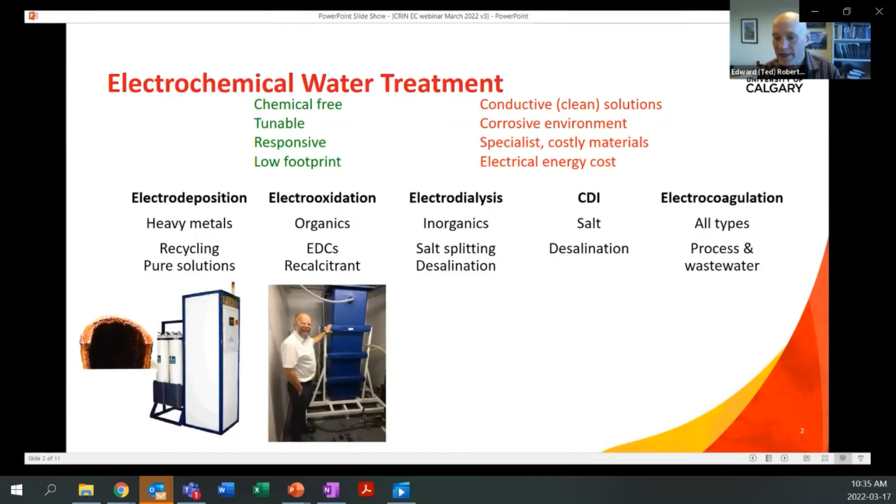Electrodialysis, where we use ion selective membranes to separate out salts. We can use it for desalination, and we can use it for salt splitting, so converting sodium sulfate into sodium hydroxide and sulfuric acid, for example. Then there's capacitive deionization, an emerging technology for desalination, where we adsorb ions onto the electrode and then release them into a concentrate solution. And finally, electrocoagulation, which I'm going to talk about in more detail in this presentation.

So I said I'd talk about the innovation process. I've seen successes and failures over my career in many different ways. When I came to Calgary, I was interested in looking at electrocoagulation for produced water treatment. I talked to several people in the industry, and they told me, oh, we tried it and it didn't work. That idea of 'we tried it and it didn't work' I've heard many times, not only for these technologies, but many others, especially in the environmental space.

What typically happens is an end user comes across this technology and thinks, oh, that sounds like a good fit. The vendor tells them all the benefits of this great technology, and they try it and it doesn't work. That's the end of the story. They invest a lot of money doing pilot tests, and it fails quite quickly. That happens 9 times out of 10 with that approach, I would say, and because of the investment being regarded as a lost investment, it's kind of a killer for the technology - no one goes back and tries it again.

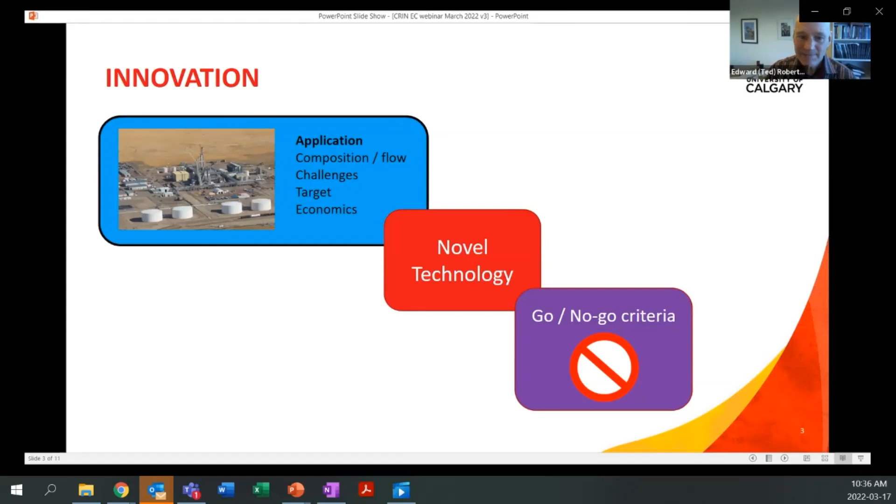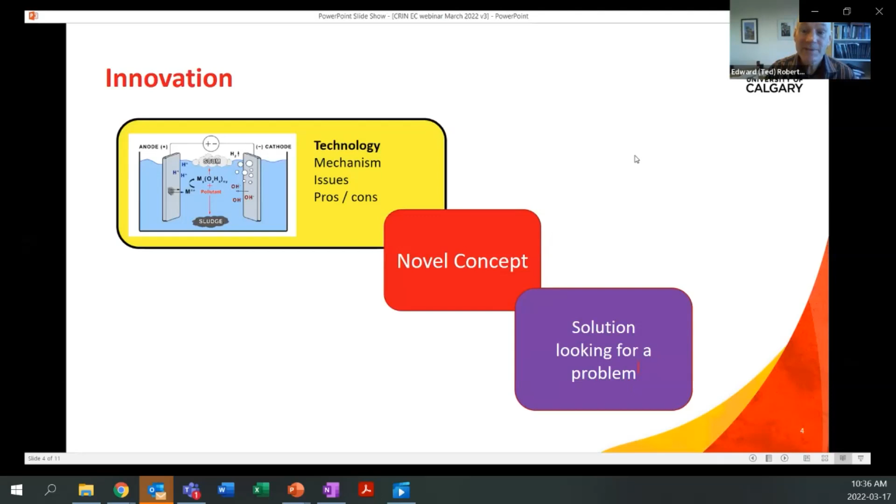The other strategy that fails often comes from the academic side, where I work. We research and try to understand the technology, its pros and cons, what the mechanism is, and then we come up with novel concepts trying to innovate the technology, and we come up with a solution. But if we don't really understand the application, we often end up with a solution that's looking for a problem. There are many examples of that, especially in the academic space. So what you really need to do is work together.

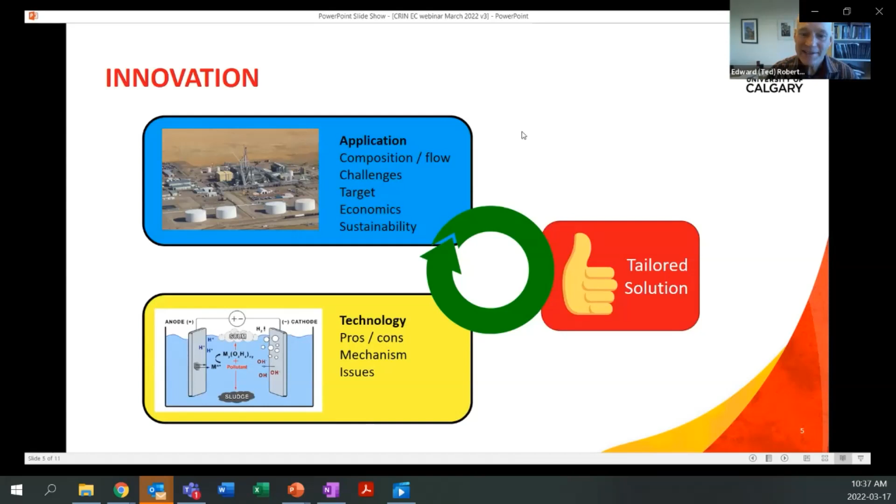So I think I've shown it as 2 boxes, but essentially it's 3: universities, the technology provider, and the end user need to work together, so we understand all of these issues together. It is not about plugging a solution into the application. It is about understanding what's going on, iterating until you have a tailored solution well suited to the application. For me, that's an iterative process, not just try it and see.

So for our case study of electrocoagulation for oil sands produced water, what is electrocoagulation? Very simple in concept, at least superficially. We simply put 2 metals, usually aluminum or iron electrodes, into the water. We pass a DC current that we suck electrons out of the anode, and that dissolves the metal into the water. At the cathode, we electrolyze the water, produce hydroxide ions, and that ends up as a metal hydroxide coagulant. So essentially, we're using electricity to dose the solution with a metal hydroxide, which coagulates and removes contaminants.

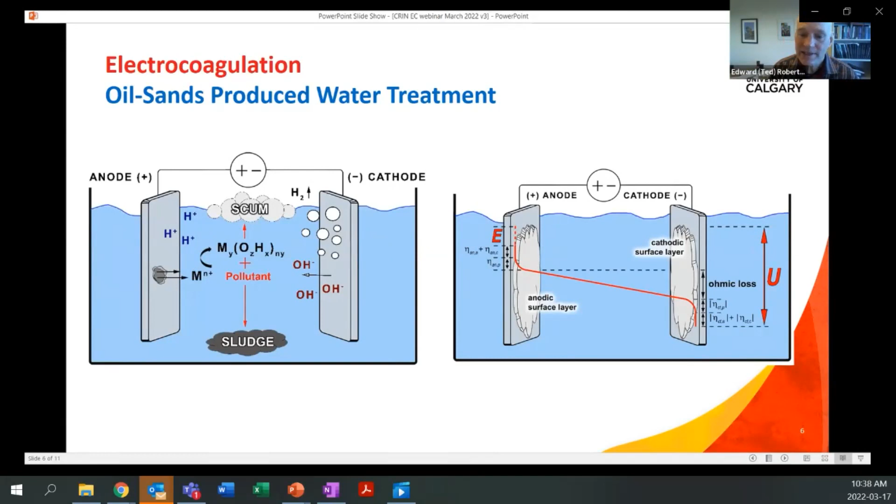One of the challenges we've been looking at is the formation of passivating or fouling layers on the electrodes, which is one of the major challenges for this technology. I'm not going to go through all the detail of what we've been doing, but we've been studying, trying to understand what's happening in this process, and it's extremely complicated. For the application, we have a salty produced water that has some other ions in it, and we have target contaminants, particularly silicate, calcium, and magnesium.

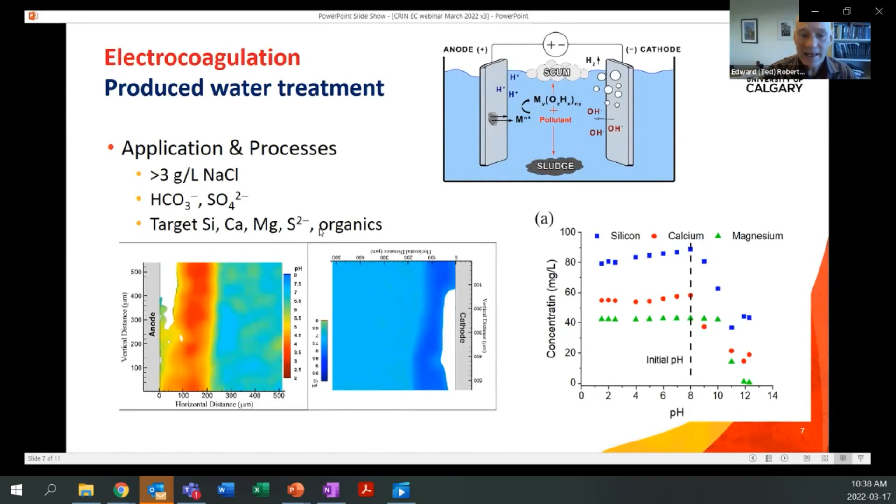One of the things we've been studying is trying to understand what's happening at the electrodes, and these videos are showing you the pH distribution close to the electrode. You generate an acid solution on the anode, but you also generate an alkaline solution at the cathode, and that can lead to precipitation on both electrodes of fouling layers and causes problems for our operation.

What we've also been looking at, we've used many different techniques so we can visualize the fouling layer. We can observe things like gas bubbles inside the precipitate. And we can also see that when we do electrochemical experiments, the ions can affect the height of this line on the right-hand side here, which tells us the rate of corrosion, the rate of dosing of the metal ion at different potentials.

What you find is with salt, sodium chloride helps the metal dissolve, but with sulfate, it actually passivates and stops that process. In our produced water, we have both sodium chloride and sodium sulfate, and so the sodium chloride helps our solutions dissolve. Through our experiments, we can try to understand what the role of all of these components in our application have on the process.

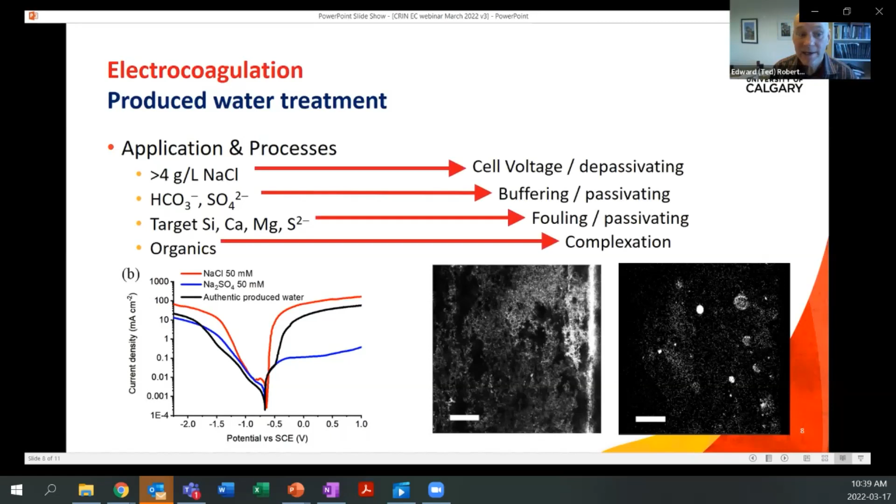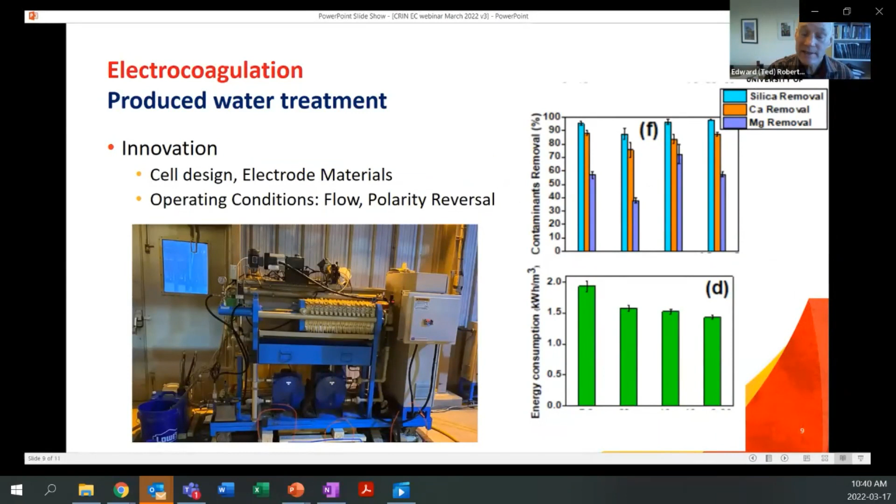That enables us to do innovation and design and tailor the process for the application. So what we've been able to do is reduce the energy consumption and enhance the contaminant removal through that process, and that requires us to tailor the cell design, the electrode materials, and the operating conditions to achieve that.

So just to wrap up, I really think that for these kinds of applications, especially for water treatment, you need this cooperative approach to make a tailored solution, and not to just give it a go and fail and give up.

I would, of course, add that it is not only a technical story, there is also the economics, the commercialization pathway. IP is often a challenge—who owns it and how is it going to be exploited. The cost of the investment required to scale up and the people involved. We've also often failed because the person in the company helping us leaves, and then we're left, and no one's interested anymore. That can also be a problem.

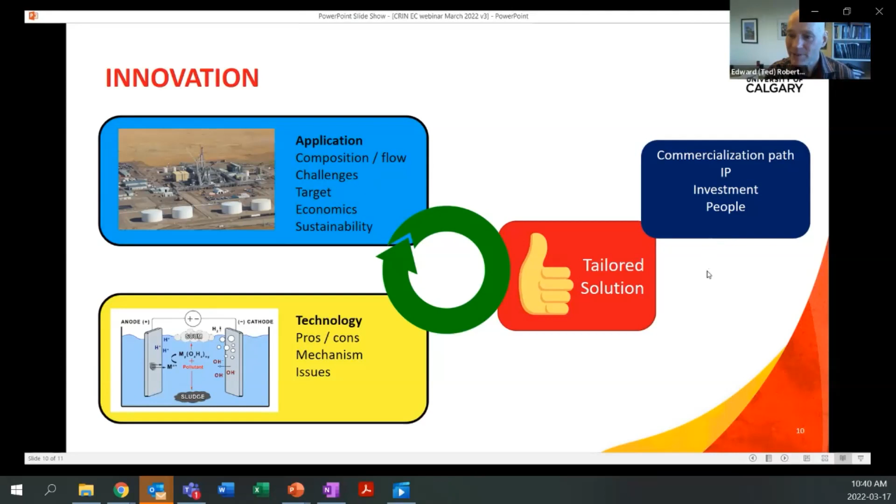So just to wrap up, I'd like to thank the sponsors of our research and our industry partners, and of course all of our researchers. I should tell you that we've had about 15 person years of research on electrocoagulation for the produced water application.

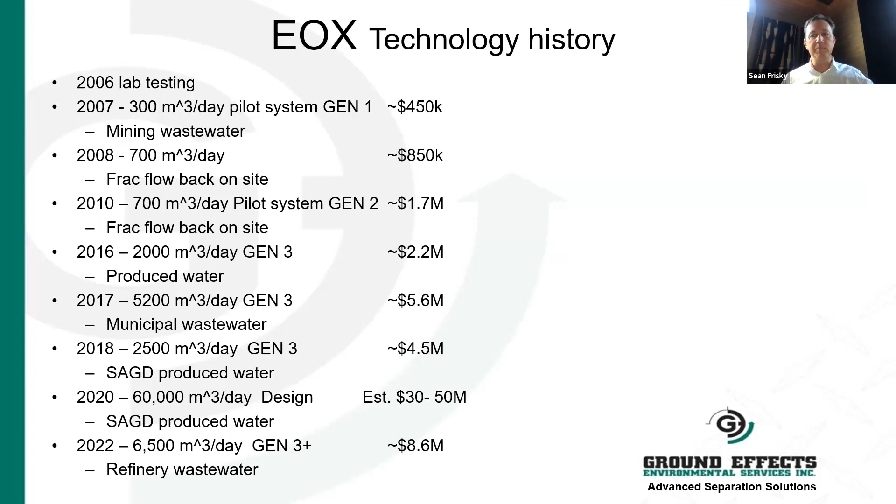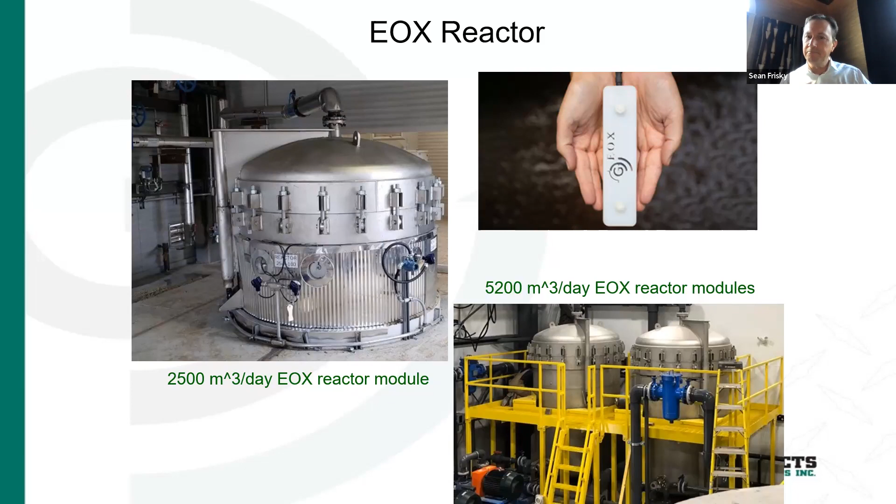The other point I wanted to make is that the electrochemical technology isn't standalone for the most part. As far as oxidation, it can be, but in typical oil and gas, there's emulsions, oils, suspended solids, all those things. So we look at it as the reactor - it's the thing that makes things happen. And then we need a process.

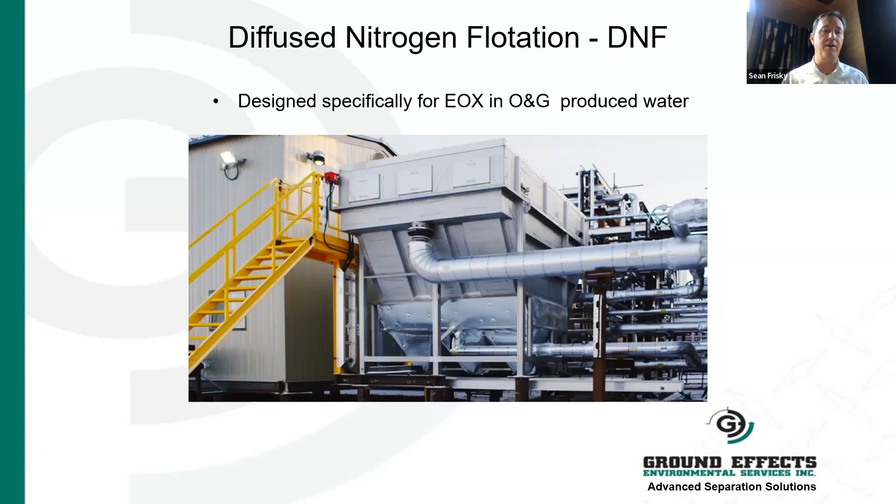Like most wastewater treatment processes, there's not too many that are single step, right? So we use our EOX reactor combined with the diffused nitrogen flotation. That's really what basically separates out all of your solids, your coagulated materials. So everything that becomes a solid can be separated off as a sludge. Next slide, please.

I'll just mention quickly before I get into this slide - we would typically follow that with some type of filtration, and it would depend on what the customer requirements are. So it could be from a simple media filtration, or it could be submerged ceramic membrane, depending on what the requirements are.

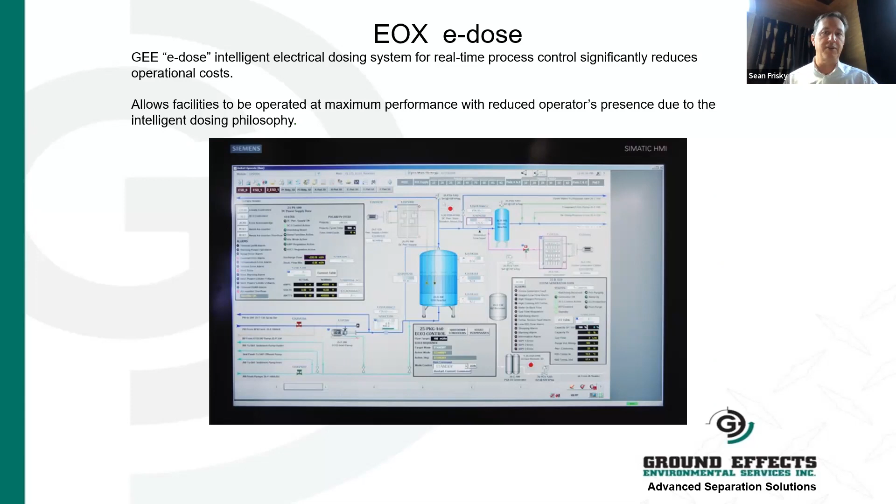Our e-dose system - one of the cool things about this technology is its ability to be tunable: the electrode gap, the electrode size, the reactor size. Those are all physical things that we would test in the lab before actually building a system for a site. When we're on site, the easily tunable things are electrode gap and amperage.

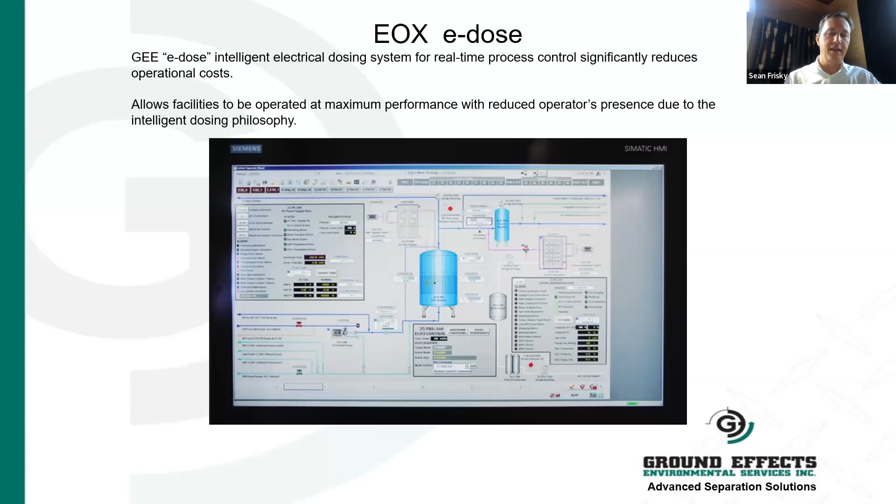So most of the tuning is based on amperage, and we can actually put in instrumentation on the back end. So if we aren't meeting one of our desired criteria for effluent, the system can automatically essentially dose, as Ted alluded to in his presentation. It can dose more electrode and create more electrochemical reactions simply by turning up the amperage. So it's a very tunable in-the-field type system that can be completely automated to maximize efficiencies, both from an electrical consumption and effluent criteria perspective.

Next slide, please. So this is just to give you a flavor of what a modular plant looks like in say SAGD. So we have our EOX building.

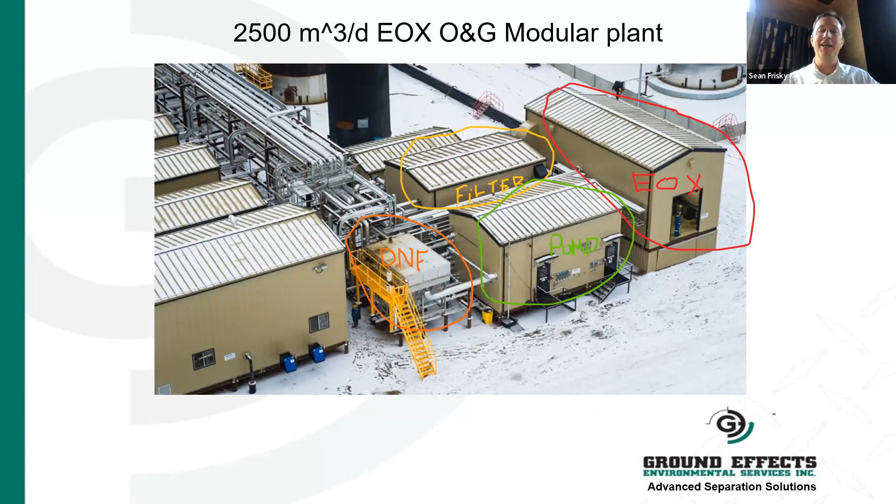I did this with paint, I don't know if you can tell that, but the EOX building is on the right, and the one in green is the pump house building, which houses all of the pumps. The filtration building is in the back, and the DNF is the orange on the left. So that's a complete process, sort of EOX, DNF, then filter.

It was all built modular - built at our facility and then shipped out. So on-site time is very quick. And I think this is important because if you compare it to hot and warm lime softening, for instance, for SAGD, it can be built offsite, which always reduces costs. It can be scaled up or down.

So it could be 500 cubes a day and used for one set of SAGD wells, or it could be 50,000 cubes a day at a centralized facility. What we've learned from this is that our CapEx is a fraction, on the order of 30 to 50% of what a normal plant would cost. And our OpEx is in the 50 to 70% range. So this technology has a great future because of those two things, and the third thing being that it's modular with a small footprint.

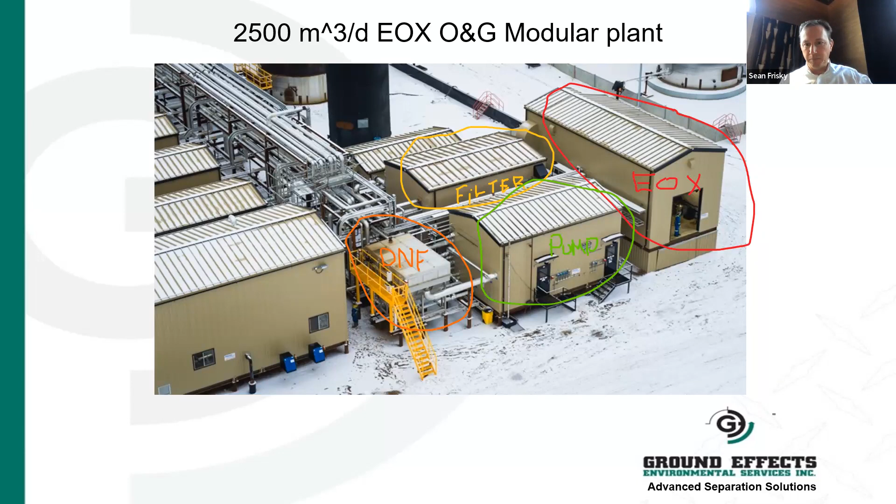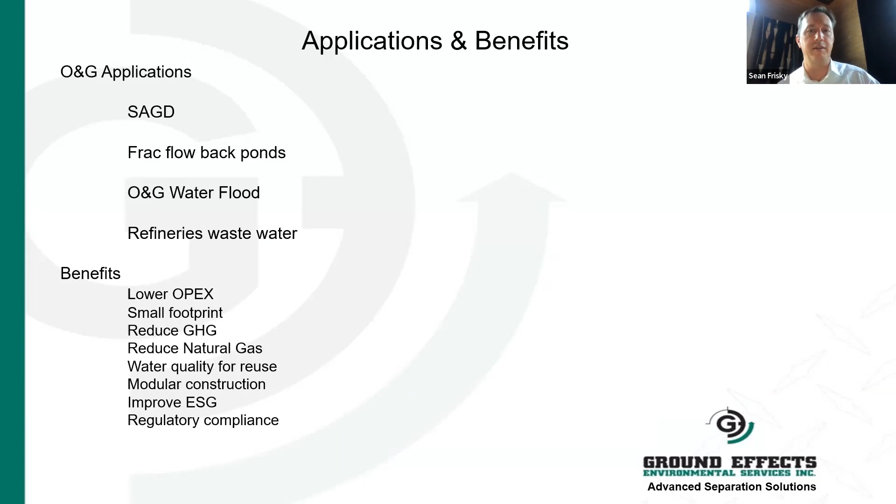So the applications for oil and gas are SAGD, frac flowback ponds, water flood, and refinery wastewater. The benefits are low OpEx, small footprint, reduces greenhouse gases. In the case of SAGD, you could reduce your natural gas consumption as well by treating it for warm, hot, water quality for reuse - modular construction. The greenhouse gases and natural gas contribute to the ESG improvement. And in the case of refinery work, regulatory compliance is the thing we're trying to achieve.

So how we do this for a customer typically is we would do a lab pilot, rental, something like that. Then that allows us to model, size it, both CapEx and OpEx. And we can do complete layout design, integration services, field tech support, and turnkey water treatment. Next slide, please.

Yeah, hit it one more time there.

So the point of this slide is the ask, I guess. One of the things we're considering is, typically we've done capital equipment sales and provided tech support, consumables, all those good things. We believe there's a market in doing a turnkey service, and we're doing this for some refineries right now where we come in, provide the equipment, the OpEx, the people, and we charge dollars per cubic meter. So the advantage to the customer is there's no technology risk, no CapEx risk. It becomes off balance sheet financing, almost like a lease for them. And there's a known cost per cube. This allows producers to focus on oil production, not water treatment.

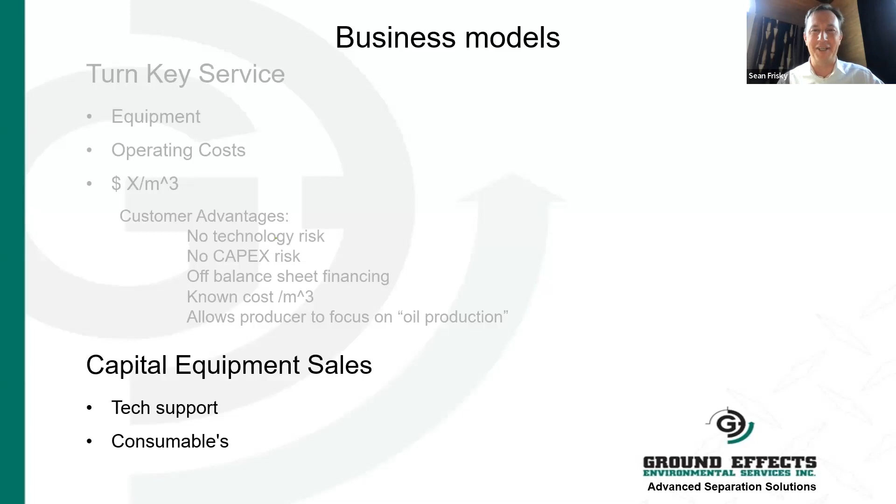Thank you. Great. Well, thanks, Sean, for battling through that. I hope you have a speedy recovery. I like the way you laid out in one of your first slides that kind of journey you've had to go through, all the different steps and costs that build up over time.

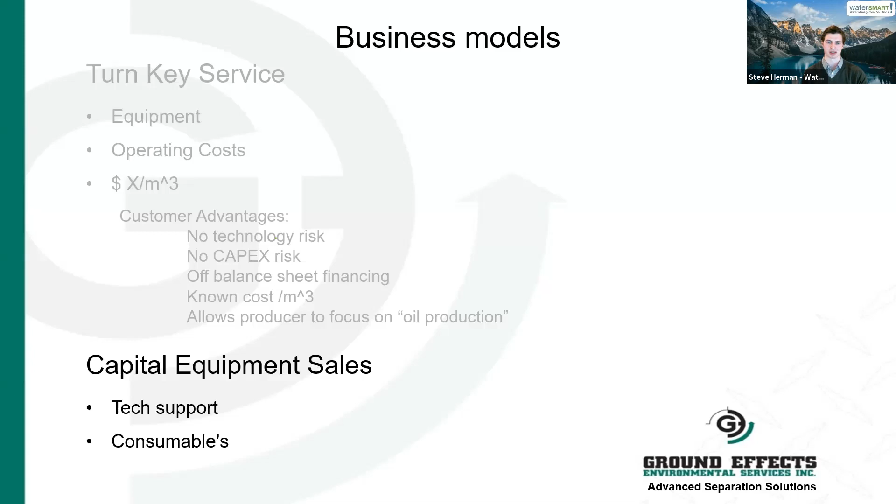Okay, thanks a lot, Steve. Good morning, I'm Norman Keevil, president of Boydel Wastewater Technologies. We don't really have a lot of time here, so I'm just going to give you a very quick introduction to the company, describe a little bit about our innovation journey, and then finish up with some lessons learned. I think we'll find it's a pretty common theme with the rest of the group who've been talking about a lot of these lessons. But anyways, if you go to the next slide.

Thank you. So Boydel is a Vancouver Island-based company that makes an electrochemical water treatment process called the water miner. It essentially combines both electrocoagulation and electrooxidation within the same reactor cell, and that's really the core to our technology. The two processes typically enhance each other, and being so close together, we find we get incredibly good performance from both. So you end up with something that, combined, is better than the sum of the parts, so to speak.

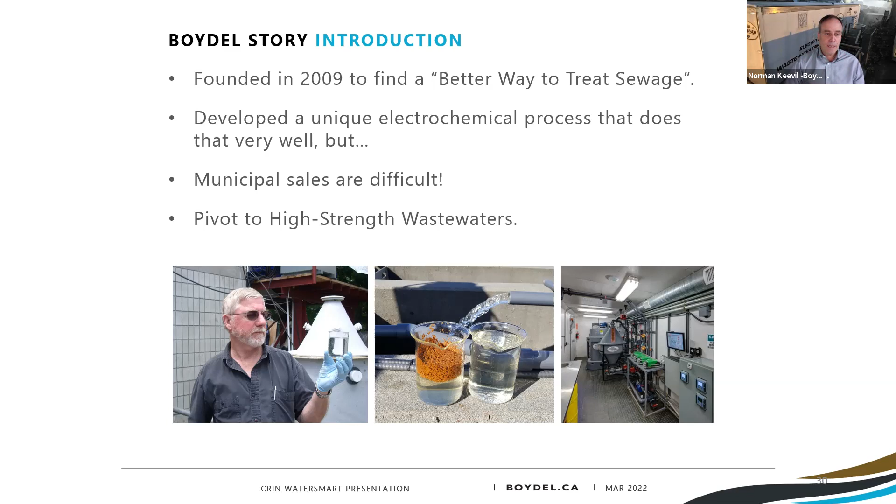So a little bit about our innovation journey. I'm not going to go into huge detail about the technology itself because we don't have time, but essentially innovation takes a long time, and we are no exception to this rule. We started with a very simple cobbled-together proof of concept in 2009, and it's gone through numerous iterations over the years—lots of refinements, testing, refining, rebuilding, redesigning, retesting, iterating. But eventually we got something that works very effectively and reliably.

We spent countless hours, over thousands of hours, testing this system at lab scale, testing different combinations of electrode materials. Because we use electrooxidation, we were testing different MMOs—our mixed metal oxide coatings—testing how the current intensities affect our systems, and testing all the different chemical parameters.

And as you can imagine, every water is different. So because we were trying all sorts of different things, from sewage to oil and gas, you end up spending an awful long time narrowing in on the exact parameters that work.

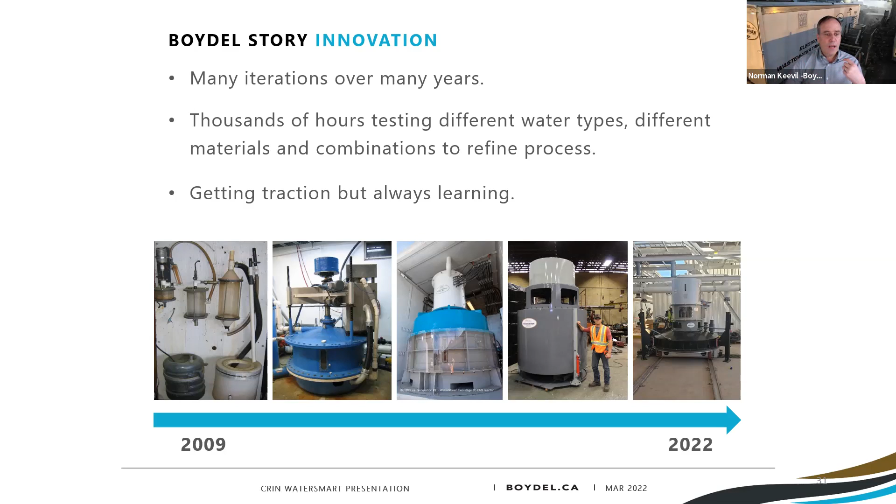So in terms of the innovation process now, every water is different. So when a customer comes to us with a potential application, we really start out with a simple paper exercise to decide whether it makes any sense at all. If it's all dissolved solids, we wouldn't touch it.

But if we decide we want to go with it and think we can do something, then we'll immediately start with small samples that we'll take into the bench, do very simple lab testing, and determine whether we can get the separation of solids and water and whether we can get the performance we want.

If we decide from there that it's worth testing further, we make a much larger sample, 1,000 liters or so, and bring it in and run it through a continuous 3 liter per minute lab scale system, where we can really refine the parameters, understand the water well, and get to exactly where we need to be.

We also take it one step further and take a mobile lab set to our customer's facility, which sometimes gives you a lot better real world application because you're testing the water right out of the process and not chasing something that might be 6 months or 2 weeks old.

Finally, if all goes well to that point, you go to the next stage, and if we're lucky, a customer might be willing to go straight to a full project. But really, because we don't have all that many systems out there, we're a young company.

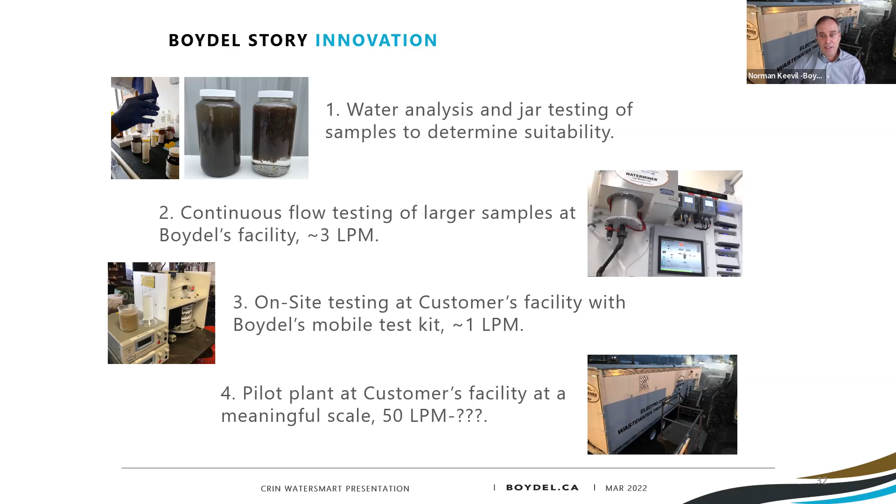Next slide, please. Just quickly, some really simple lessons learned. One of the first things I would say we learned is that demonstrations really do matter.

As I said, if people need to see it working, finding a very early adopter for a new $500 consumer gadget may be easy. Trying to get somebody to commit to a $1 million water treatment plant that they've never seen is much more difficult. So getting demonstrations out there is important, and we haven't been particularly good at this.

I mentioned the 18-month pilot that was done many years ago when we were working with another engineering firm. Since then, we haven't really had the ability to put these things in the field and get people out there. We're trying to change that, but it's a challenging process. Part of the reason we were able to do the 18-month pilot is because we had the wherewithal and cash flow of the large engineering firm partnering with us.

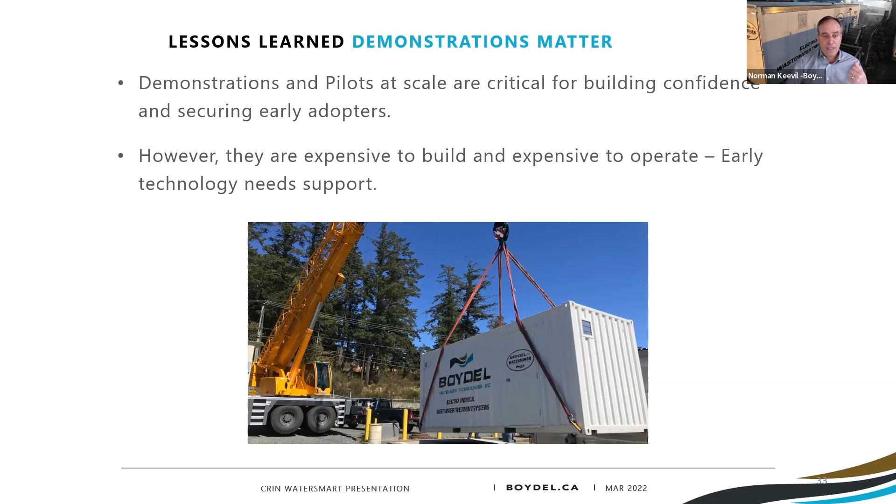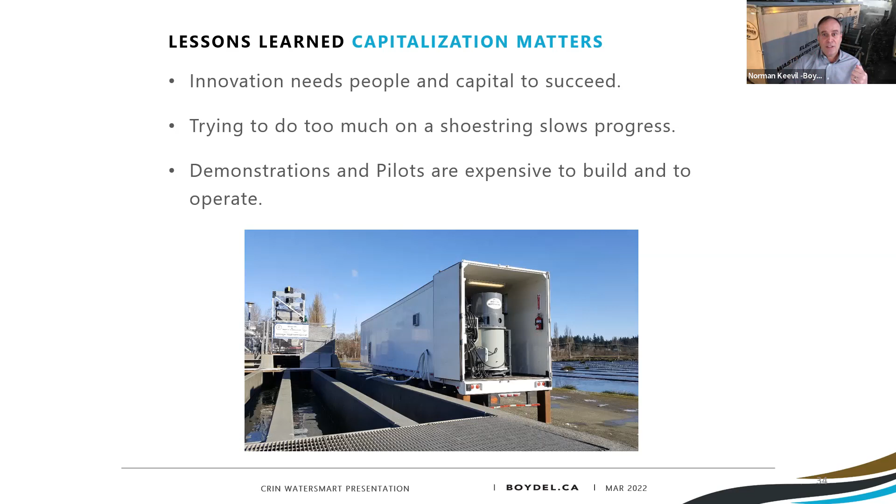The challenge is it doesn't always work in real life. There can be some real mismatches between larger industry players and smaller startups. I've seen this on IP, on who owns the IP. It's the lifeblood of a small company, but the larger players may feel that they're helping to fund this thing, so they need to own part of it.

There can be timing mismatches too. We've had projects that were critical to us and high urgency, but just not that urgent to the larger player we're working with. So I think we need to find really creative ways to work together, particularly, from our experience, these smaller companies just starting out need to be able to work with the large companies. There need to be creative ways to finance these projects, maybe it's as simple as bringing in resources and people from the large company to help support the pilots. I don't know, there's a ton of different ideas out there. I'm just throwing some out, but I think creative collaboration is something that we've missed, and I think it can make a huge difference.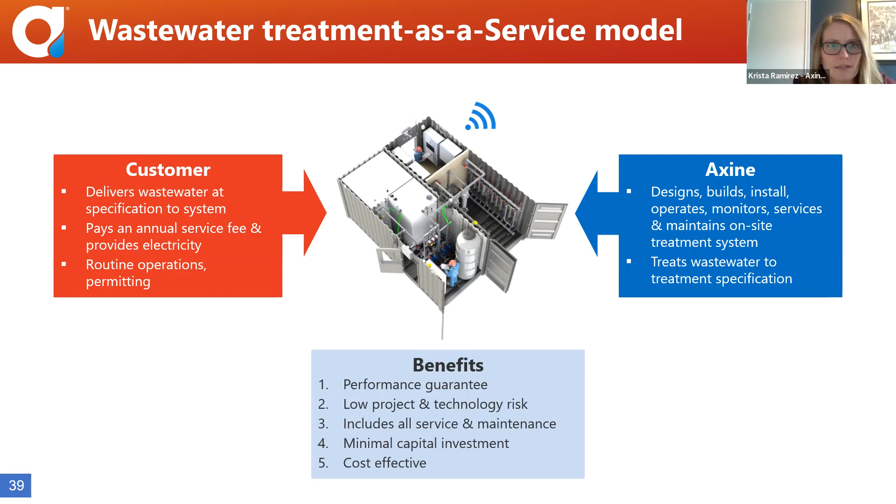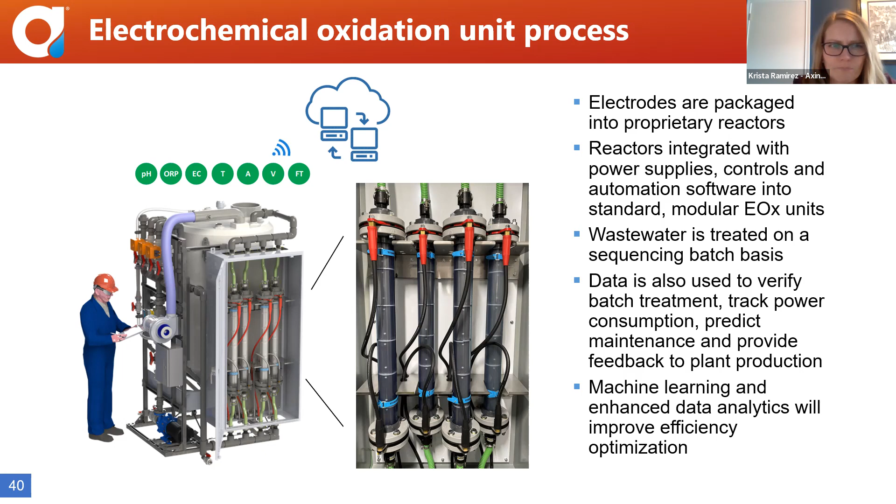The data is used to verify the treatment, tracking power consumption, predictive maintenance, and providing real-time feedback to the plant as well as to Axine. We leverage machine learning and enhanced data analytics to improve that efficiency. We don't do continuous improvement, rather we're trying to improve with leaps and bounds. Because this is a service model, just like if you've got an iPhone, there's a software update that's going to hopefully not be a glitch, it's going to be a real improvement to you at no cost. That's the same premise we do with our customers. As we make improvements, our customers, as long as they've got a service agreement with us, they're getting those same benefits and improvements.

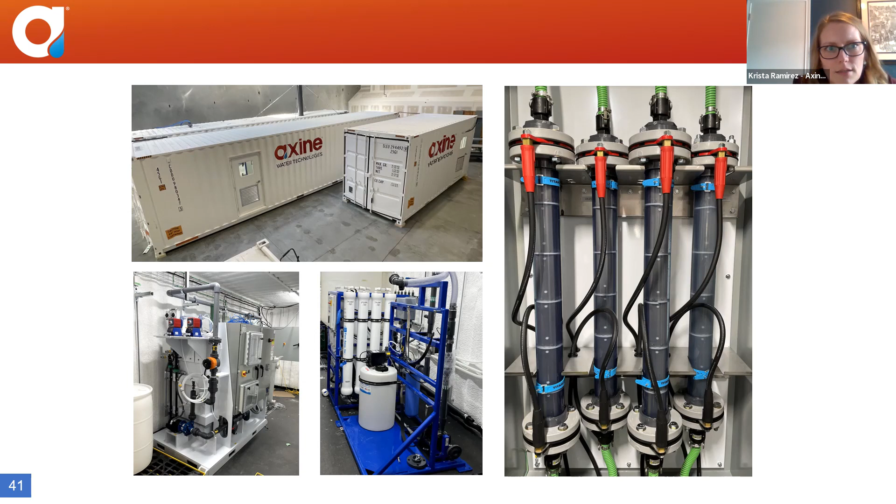So, challenges. As I mentioned, I am very new with Axine, so I'm going to do the best I can with this. I'm sure there are more challenges.

First and foremost, the WaaS business model is absolutely challenging. To date, we were founded in 2010, and our first commercial install happened in 2018, so only 4 years ago. Now we've got 4 systems installed and what looks like a healthy pipeline, but the fact is this is a disruptive business model. It's not what people are used to doing. They're used to buying capital equipment.

But with that, I think there's a lot of advantages that come with this service model. We're dealing mostly, or exclusively, with industrial facilities. These facilities are there to make money with whatever it is they're manufacturing. They're not like a municipality that has this deep bench of plant operators. They don't have the expertise, the staff, and the personnel, and they don't want it. So that's where our business model is really great.

Change in target market: when Axine got their start, as far as I know, we were targeting oil and gas, and then as time went on, it was specialty chemicals. I just looked up in our archive presentations the other day, from 2015, these were our beachheads, and pharmaceutical wasn't on that list. That is absolutely our number one target right now, the pharmaceutical industry, with PFAS coming up the rear, PFAS and industrial applications.

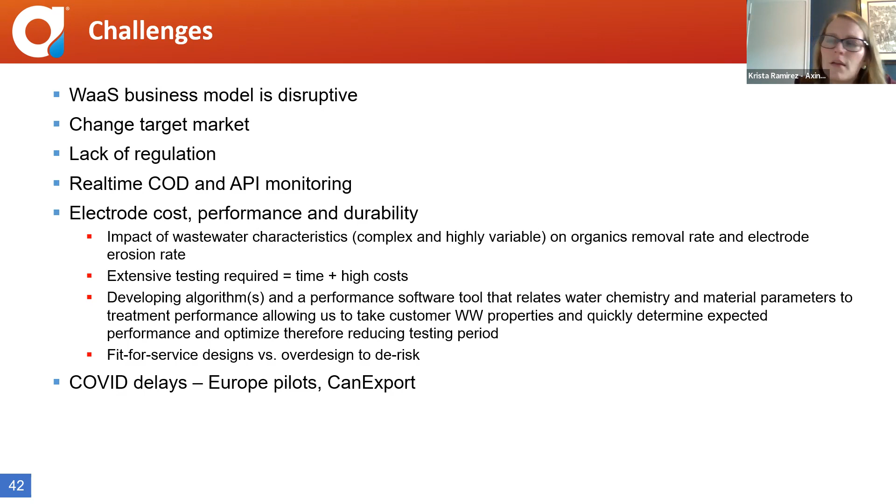And then we were trying to use the CanExport program, and I know that's on my radar of things I need to do. I've been talking with the Trade Commissioner's office about that program to support us, not only from a technology standpoint but also from a commercial standpoint, helping us travel to different places around the world. We're very focused on the Americas and Europe at this point, but we absolutely plan to take more advantage of that program. And that's what I've got, if anyone has any questions.